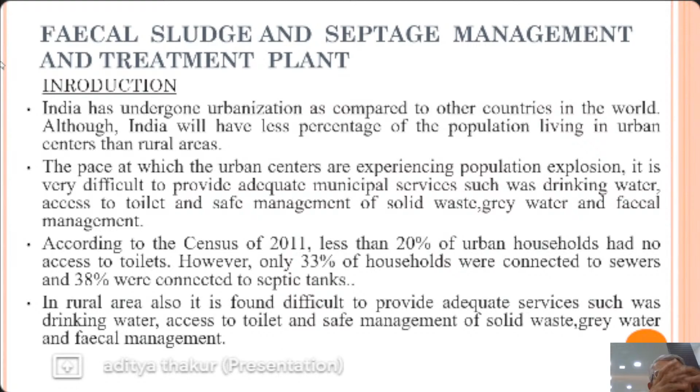Taking a comprehensive look at today's sanitation position in India, it is a horrible situation actually. 37 million people practice open defecation in urban India. 28 million people with individual toilets use insanitary methods of disposal of waste, and 43,117 MLD of untreated waste is discharged into water bodies or on land.

It is a very horrible situation because this untreated wastewater discharge into water bodies pollutes water bodies, and it also pollutes the groundwater, causing pollution and harmful effects to the environment. These cause undesirable changes to the ecosystem, reduction in economic value of resources, aesthetic damages, and human health risks. Contaminants of concern present in the water include pathogens, nutrients, heavy metals, suspended solids, increased biochemical oxygen demand, chemical oxygen demand, and oil and grease.

All this wastewater should be treated properly, or in future we will face a very difficult situation.

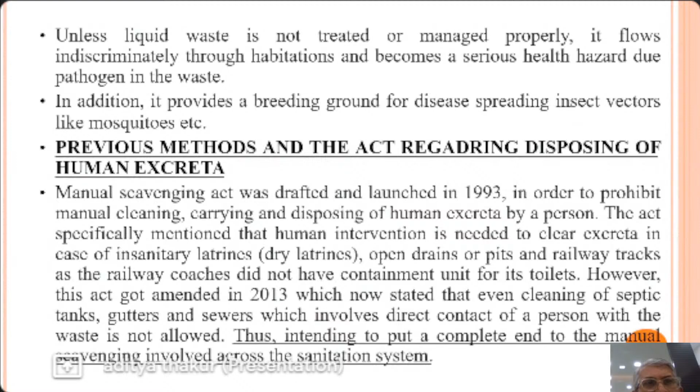In 2014, the Government of India introduced Swachh Bharat Mission, a flagship program with an objective to improve the sanitation situation in India. Although it has many objectives, two important ones pertaining to managing human waste are eliminating open defecation and manual scavenging. In some areas manual scavenging was still practiced, and Swachh Bharat Mission aimed to completely stop it.

To achieve the first objective, certain indicators and guidelines were laid down under the program: no household should engage in open defecation, no insanitary toilets are allowed to be built, and all existing pit latrines must be addressed.

Subsequent to the introduction of the Manual Scavenging Act, the Government of India in 2014 took up the huge task of eliminating open defecation in India. Swachh Bharat Mission was launched, with a focus on making urban and rural habitations open defecation free. The policy specifically mentioned that all households should have access to a toilet, either an individual household toilet or a community toilet.

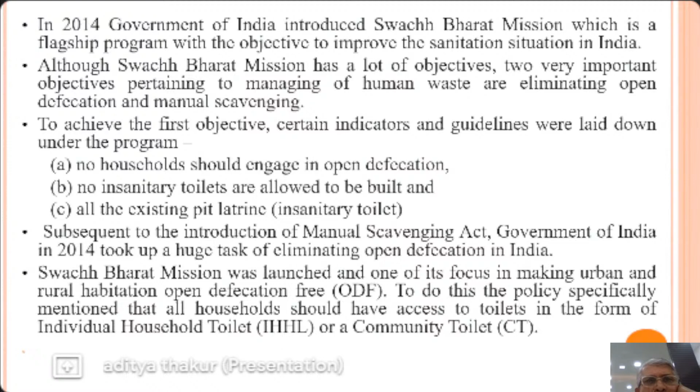But creating infrastructure in the form of toilets and containment systems is only one part. Government soon realized that maintenance of this infrastructure is very important. Without managing the waste originating from the household and containment unit, the objective of sanitation cannot be ensured. So the concept of ODF plus plus was brought forward, which stated that fecal sludge, septage, and sewage should also be safely managed at the local government level.

Then in 2016, fecal sludge and septage management, FSSM, got formal recognition in different forms. Along with the national policy on FSSM, the government provided plenty of guidelines, standards, and resources in the form of primers and other publications.

Now we discuss the present sanitary system in urban centers. In developing countries, due to the availability of water, flush toilets—the wet systems—are the easiest to operate and maintain. Water is used to transport the waste from one point to another. These systems are called wet systems.

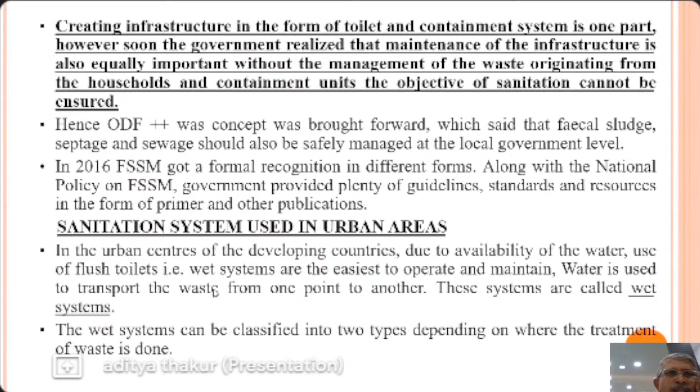For this, sewer lines were laid and waste carried to the sewage treatment plant. This is the offsite disposal system, where liquid and solid waste are carried away from the point of generation using a sewage network. The sewage network brings waste from a mini city, the households, to one point where a wastewater treatment plant is set up. This is called sewer sanitation, that is, offsite.

Then there is the onsite disposal system, where solids are stored in a containment unit and the liquid effluent is disposed of into the ground using a soak pit or soak away. After a duration of a few years, the contained solids are emptied and transferred for further treatment. Since conveyance of the solid is done by mechanized equipment such as vacuum trucks, this type of sanitation system is called non-sewer system.

In rural areas, it is not possible to lay sewer lines to take the wastewater to the treatment plant, so vacuum trucks are used.

Then in some areas, a hybrid disposal system is used. In India, solids are contained in septic tanks at the household level, and the sullage is disposed of into drains outside the houses. The network of drains collects the sullage from all households, and by gravity brings it to surface water bodies such as rivers, lakes, and ponds.

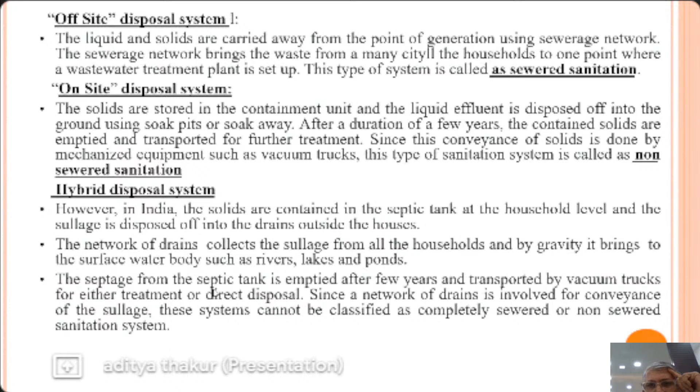Again, we are polluting rivers and lakes by delivering sludge into them. The septage from the septic tank is emptied after a few years and transported by vacuum trucks for either treatment or direct disposal. Since the network of drainage is involved in conveyance of the sullage, this system cannot be classified as completely sewered or non-sewered sanitation system.

So we can see that disposal systems should be properly designed, or otherwise our water bodies and ecosystem balance will collapse.

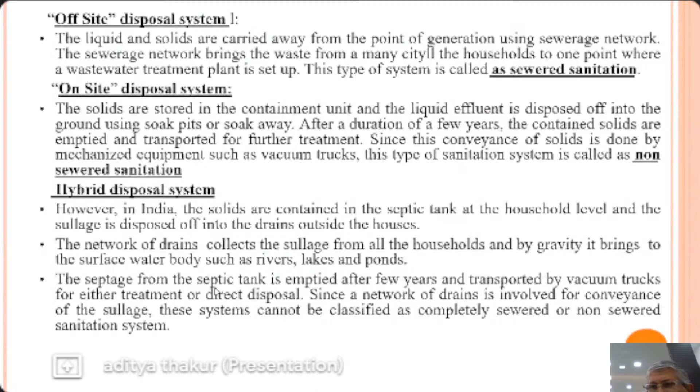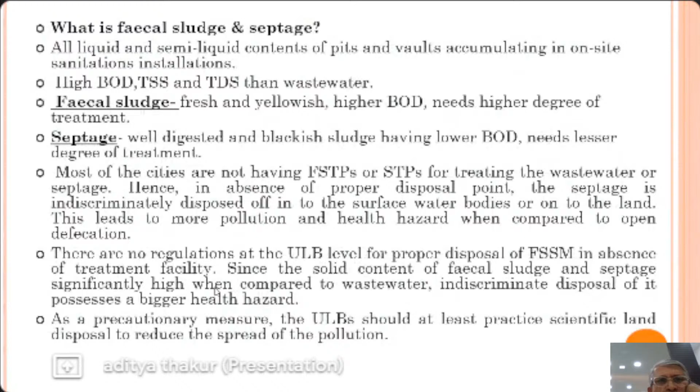So what is fecal sludge and septage? All liquid and semi-liquids contents of pits and vaults accumulating in onsite sanitation installations have high BOD, total solids, total suspended solids and total dissolved solids compared to wastewater. Fecal sludge is fresh and yellowish, with higher BOD, needing a high degree of treatment. Septage is well digested and blackish sludge, having a lower BOD and needing a lesser degree of treatment.

Most cities do not have FSTP or STP for treating wastewater or septage. Hence, in the absence of a proper disposal point, septage is indiscriminately disposed of in surface water bodies. As explained in the previous slide, this causes more pollution and health hazards compared to open defecation.

There are no regulations at the ULB level for proper disposal of fecal sludge and septage management in absence of a treatment facility.

Since the solid content of fecal sludge and septage is significantly higher compared to wastewater, indiscriminate disposal poses a bigger health hazard. As a precautionary measure, the ULB should at least practice scientific land disposal to reduce the spread of pollution. So government has given strict guidelines that fecal sludge should not be disposed in the river or on land, and proper actions and precautionary measures should be taken to avoid further health hazard or ecological imbalance.

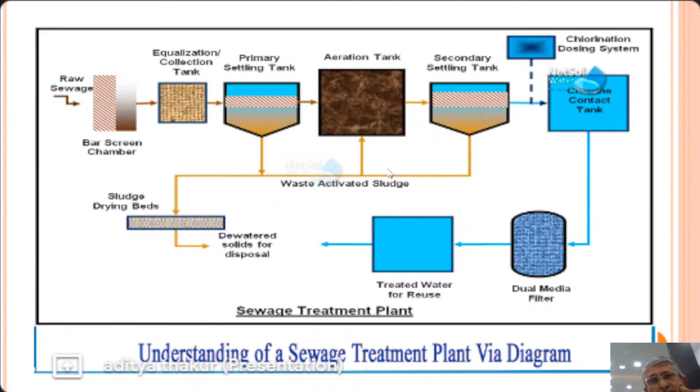So in rural areas, in some rural parts, they could not bear this huge cost. So instead of going for this complex and costly system, government introduced a very simple system which requires less maintenance.

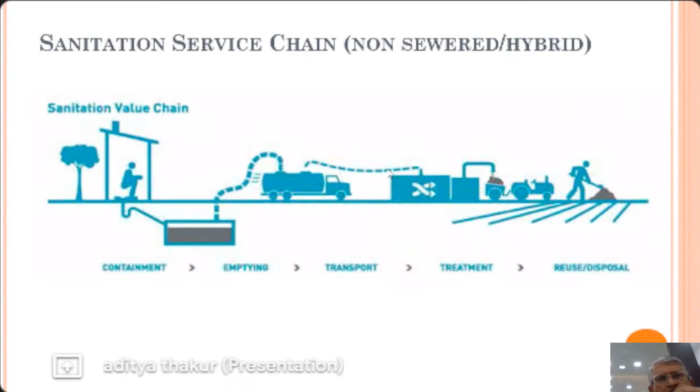Here, STP and FSTP - government now has taken initiative that instead of giving STPs to every ULB, fecal sludge treatment plants are much easier to operate, and have very less cost than providing STP.

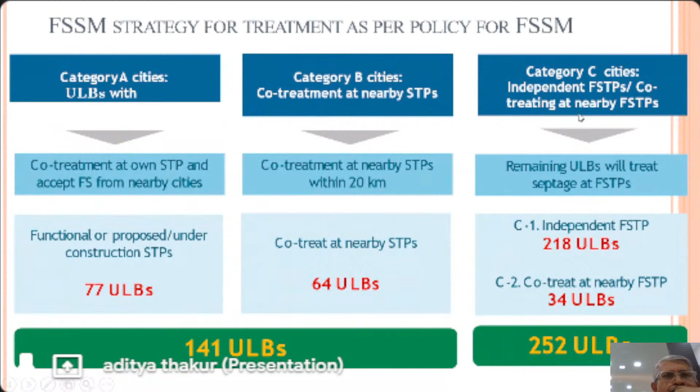So we'll go to the next slide. Benefits of fecal sludge and septage management. Desludging frequency - we have to decide a desludging frequency, in what manner we can go, and what treatment is actually suggested.

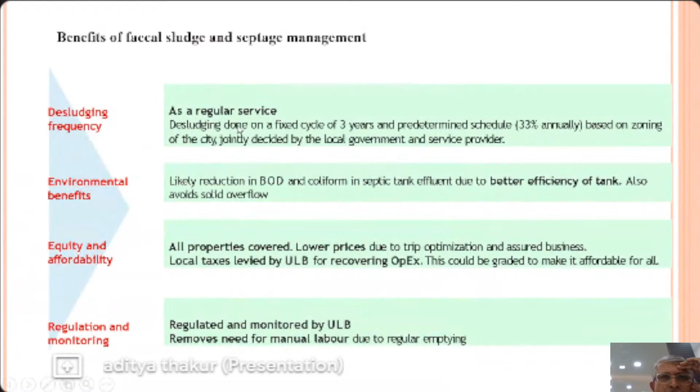We are going to the next slide. First we should study this slide. Desludging frequency as a regular service - desludging done on a fixed cycle of 3 years and predetermined schedule. Actually, in fecal sludge treatment, every household has a septic tank, and after every 3 years, that septic tank should be cleared by vacuum truck, and the sludge should be carried for treatment. So after every 3 years, that septic tank should be cleared.

Then environment benefits - likely reduction in BOD and coliform in the septic tank effluent due to better efficiency of the tank, also avoiding solid overflow. Environment benefit of FST - if you are providing fecal sludge treatment, then the environment benefit is that after treatment, the BOD of that waste is reduced considerably.

That effluent is less than 30 mg per liter, and coliform gets completely removed, and that effluent can be used for gardening purpose or any other use.

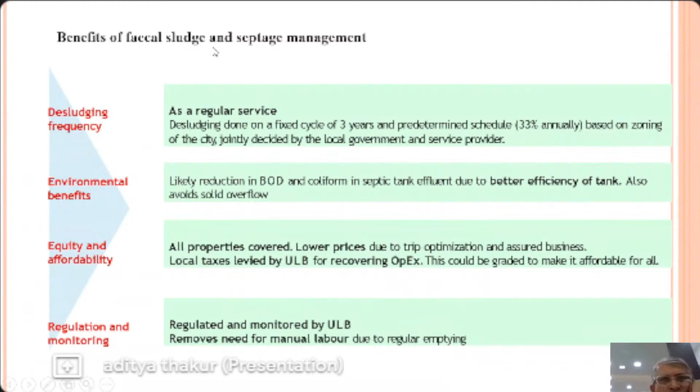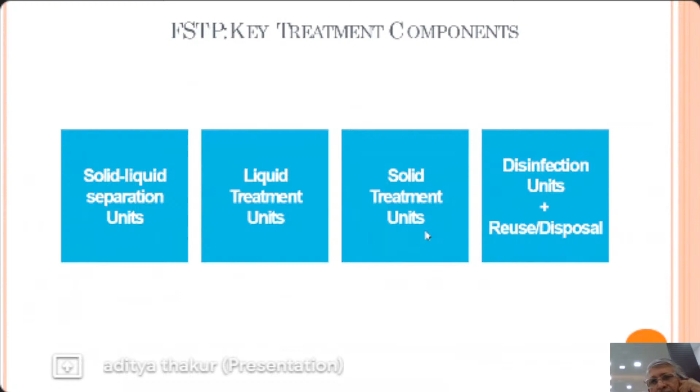seen when fecal sludge treatment plant management is properly done. So in a fecal sludge treatment plant, there are key treatment components: solid-liquid separation and liquid treatment units, then solid treatment units, and fourth, disinfection unit plus reuse and disposal.

There are various septage management options available. Group A: septage to compost, sedimentation ponds first, then sludge drying bed, which includes planted sludge drying bed and unplanted sludge drying bed. Then co-composting, mechanical dewatering, waste stabilization pond, and advanced nutrient recovery - this is group one. Group B includes biomethanation and anaerobic biogas reactor, incineration, gasification, and pyrolysis.

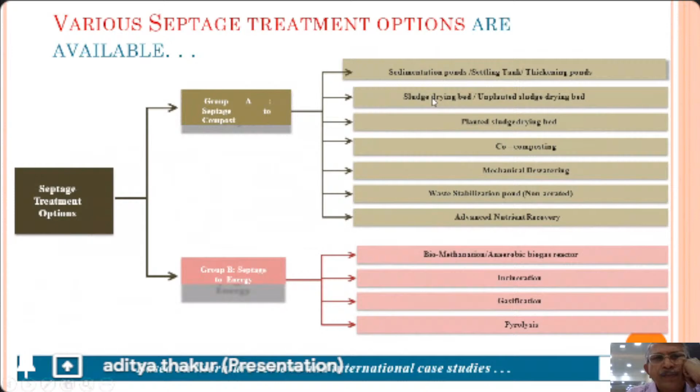These are the groupings done by FSSM, which are beneficial to rural areas. They decided group B is very costly, and therefore in Maharashtra, these four FST (fecal sludge treatment) plants are introduced and approved by NEERI. These four treatments are: one, sludge drying bed; another, planted sludge drying bed; third, upflow anaerobic sludge blanket; and fourth, moving bed bioreactor.

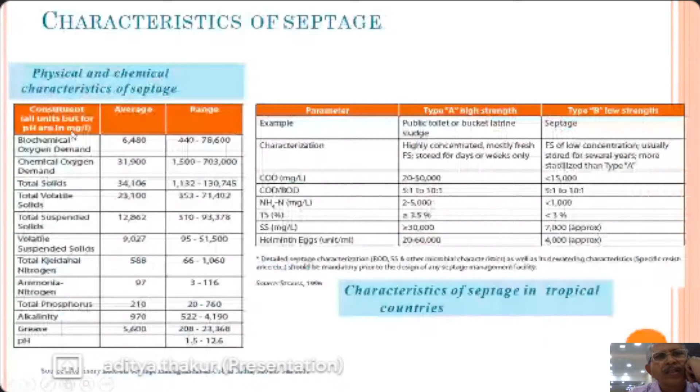Physical-chemical characteristics of septage are given here. Normally, biochemical oxygen demand ranges between 440 to 78,600. Then chemical oxygen demand is...

Sorry, there was an urgent call from my boss, for a minute please.

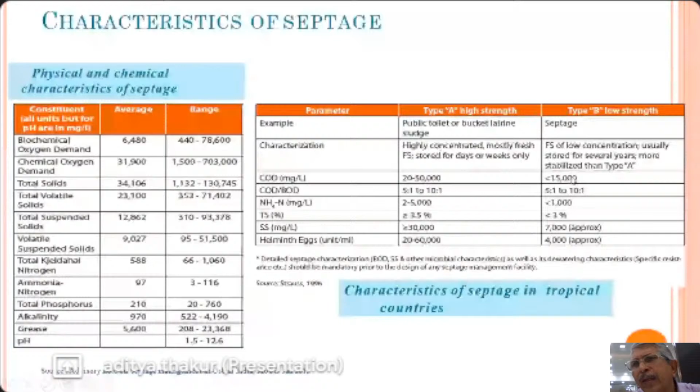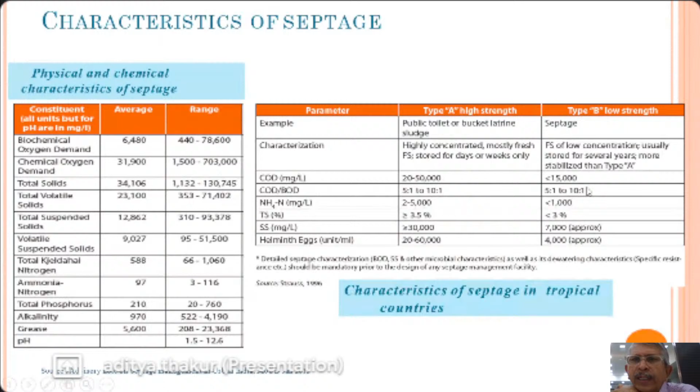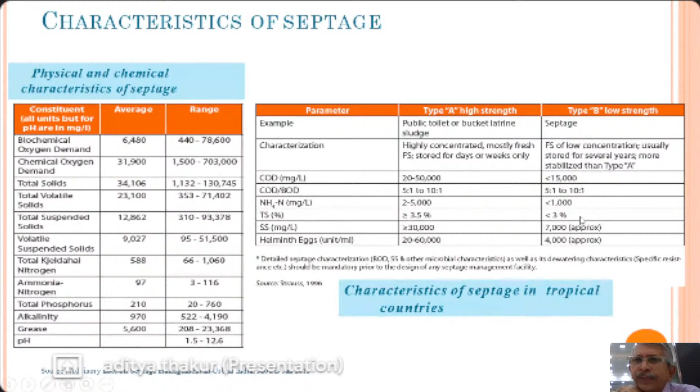We can treat this septage.

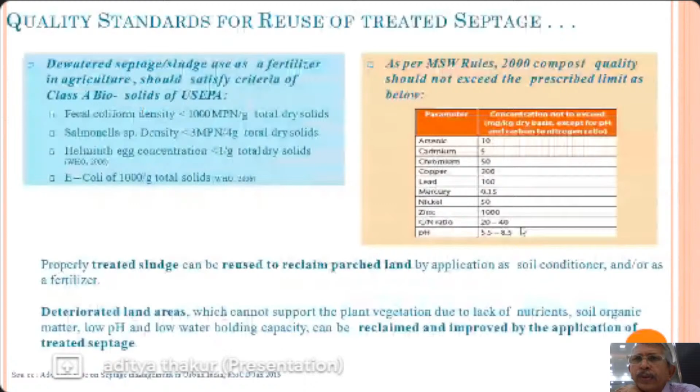As per MSW rules, the content concentration not to exceed the prescribed limits are given here. Arsenic should be up to 10 only, cadmium up to 5 only, chromium - all these are parameters in MSW.

Dewatered septage sludge is used as fertilizer. The fecal coliform density should be less than 1000 MPN. Salmonella sp. density shall be less than 3 MPN, and E. coli less than 1000 per gram of total solid. All these are the quality standards

if we want to use the treated sludge. Properly treated sludge can be used to reclaim parched land by application as a soil conditioner or fertilizer. Deteriorated land areas which cannot support plant vegetation due to lack of nutrients, soil organic matter, low pH, and low water holding capacity can be reclaimed and improved by application of treated septage.

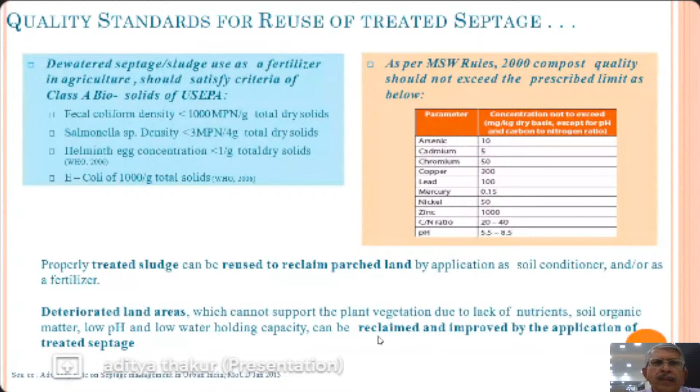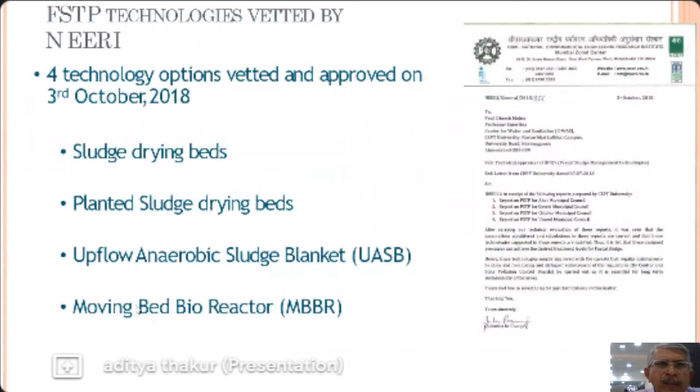Before selection of the technologies, all five components are very necessary: land requirement, electricity requirement, management capacity, fund requirement, and local conditions. So before selecting the technology, all 5 points should be studied first.

I told you in the previous slide that four technologies were introduced by government of Maharashtra. Every rural body or urban local body could not bear UASB or MBBR, so they can go for unplanted or planted sludge drying bed, because land requirement is relatively high, and in rural areas land can be easily available. But in urban areas, land issues are very high, so UASB and MBBR, which require less space, can be provided there.

Then electricity requirement: in rural areas they have low electricity, and in some rural areas we are still facing electricity problems, so electricity-based technologies like STPs and FSTPs cannot be offered in rural areas. But urban local bodies have continuous electricity supply and can afford it by applying taxes. Then management capacity - in rural areas there is a lack of human resources.

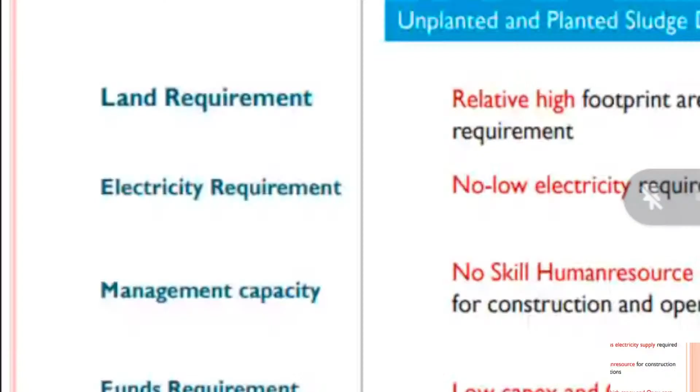It will not be affected by the rainy season, because they are very compact systems.

Directly going to the systems, we are using the four FSTP system. The first is the unplanted sludge drying bed.

Here, septage is collected by vacuum truck from every household, and then that truck is emptied into the settling tank having a screen. The screening is done and the floating matters are removed.

The unplanted sludge is moved to the unplanted sludge drying bed, and after pouring the sludge into this bed, the liquid from the wastewater goes to the anaerobic baffle reactor.

This anaerobic baffle reactor is nothing but an improved septic tank. It has an RCC chamber with baffle walls.

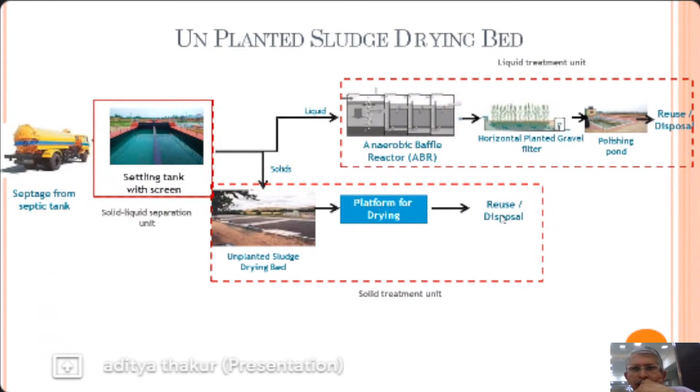In Bhubaneswar, Odisha, this type of plant is installed. It has a capacity of 75 KLD, and the capital cost incurred was 285 lakhs rupees. For this plant, they required 19.25 lakhs per annum for operation and maintenance, and it was situated in 10,117 square meters. This plant was commissioned in June 2018 and is still properly operated by private operators.

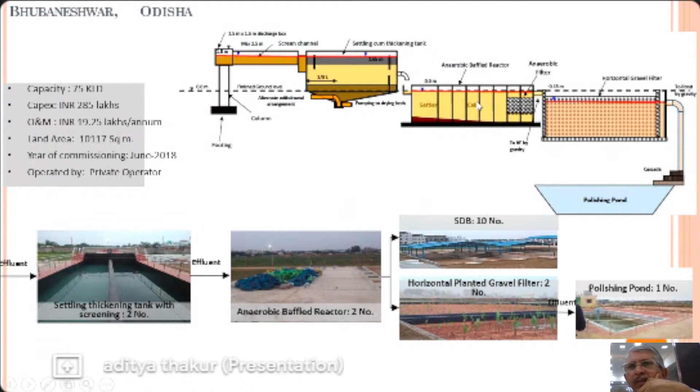Now you can see the plan here: the truck discharges the fecal sludge here, then through the channel it goes to the unplanted sludge drying bed, and from the sludge drying bed it goes to the anaerobic baffle filter, and from there it goes to the horizontal gravel filter. The clear water is then sent to the polishing pond. This is the elevation, which we can easily understand.

In this unplanted drying bed, there are various layers of material provided in the sludge drying bed.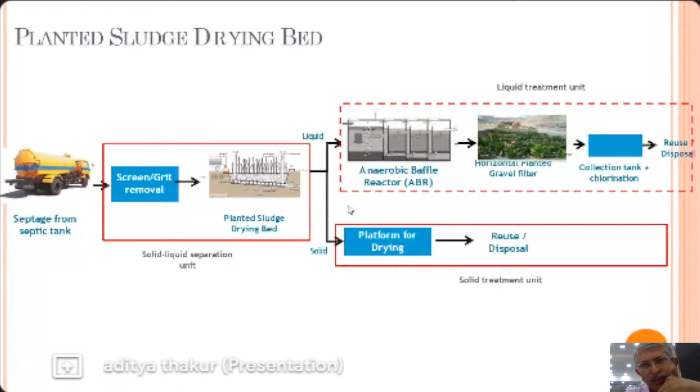Here in this sludge drying bed, the plants are there. You can see the plants here, and these plants also have a role to reduce odor of the water, and take part in the digestion of organic matter in the wastewater.

Same thing here: the liquid is sent to the anaerobic baffle reactor, and the solid, after drying, the sludge is sent to the platform for drying as manure and used for disposal.

After the wastewater is allowed to pass through the anaerobic baffle reactor, considerable BOD of the wastewater is reduced, and then it is allowed to pass through the horizontal planted gravel filter.

After the gravel filter, water passes and is collected in the tank, and that can be allowed for use. Sometimes chlorination is also done if needed.

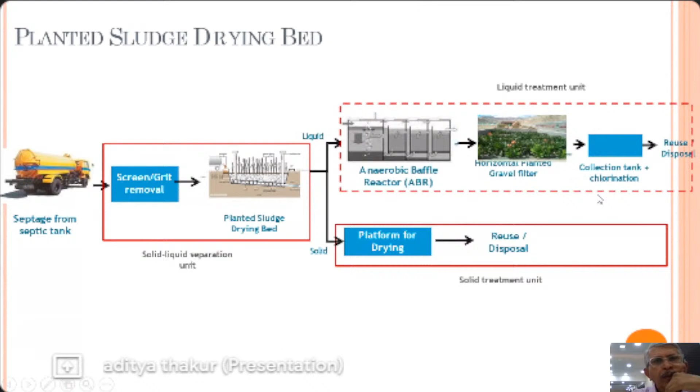This type of FSTP is at Leh area and Khulna. In Leh, a 12 KLD plant was constructed. Land required was 720 square meters only, capital cost involved was 52 lakh rupees, and operation and maintenance cost was 10 lakh rupees per year. It was commissioned in 2017, and it is still working.

After every system, I would like to show these plants to you, because these technologies are not only on paper, but they are already executed at the site. So I am interested in showing all these costs and photos to you.

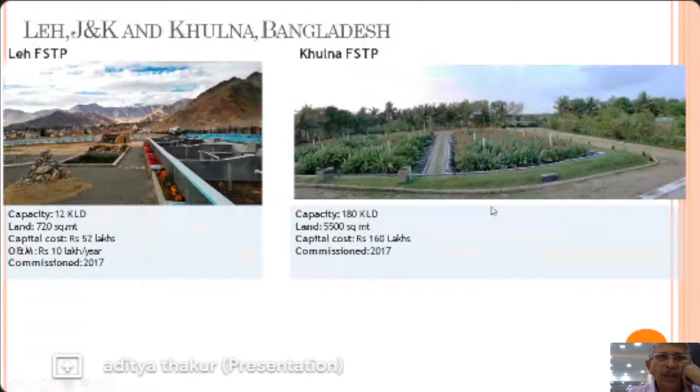Now, upflow anaerobic sludge blanket. I already told you this is the costliest type of FSTP technology, and this can be afforded only by rich municipal corporations, which can share their contribution toward the money spent on construction. It has septic waste from a septic tank, which can be collected from the vacuum truck.

Then screen and grit removal is done here. Then the collection tank. Then the water collected goes to the clarifier to settle down, flocculation takes place there, and then it is sent to the UASB reactor, that is the upflow anaerobic sludge blanket.

It has a typical construction here, so my time doesn't permit me to explain in detail. But if I get another lecture, I may explain to you in detail what UASB is and how it works.

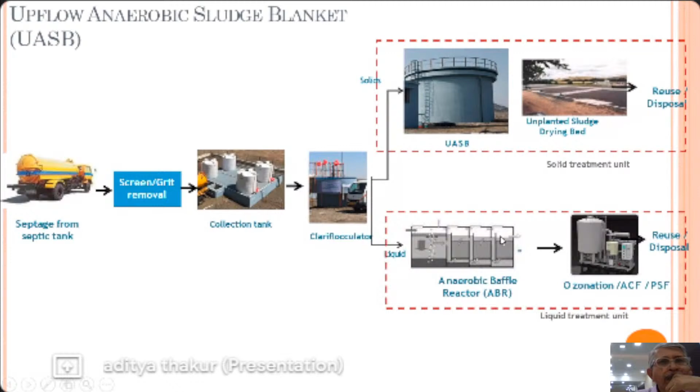Then, the UASB system is installed in Sinnar.

It has the capacity of 70 KLD, and the plant is situated in 1,547 square meter land. Capital cost involved was 1 crore 63 lakhs, and operation maintenance cost was 8.3 lakh per year. It was commissioned in 2019. It's a recent plant, a very good plant. If anybody is interested, they can go and see it. It is working very finely, and the effluent was also very good, meeting the standard set by MOEF. So this is achievable, appreciable work done by the Sinnar Corporation, Sinnar Council.

Then another plant is at Cochin. It has a capacity of 100 KLD, and land required for this is 1,200 square meter. Capital cost was 275 lakhs, and it has a huge O&M cost required because its capacity is higher. It requires 24 to 30 lakhs per year, as compared to Sinnar, because there are different cost parameters involved—why the cost is low, operation cost is higher or lower.

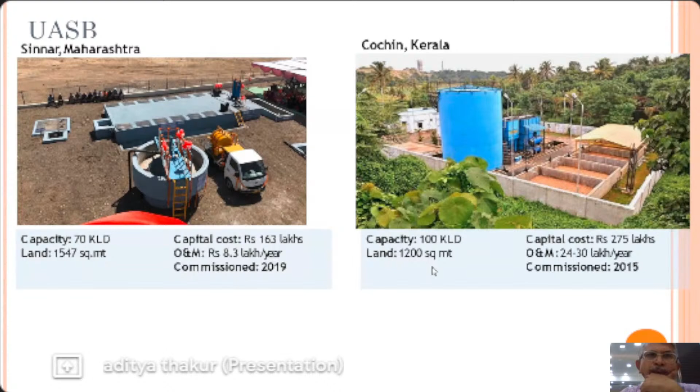Now, moving bed bioreactors. This type of FSTP is also running very well, and here a moving bed bioreactor is used. BOD is reduced considerably. The flow diagram is: septage from the septic tank is allowed to the collection with the screen, then after screening, the solid-liquid separation unit is there. After solid and liquid separation, the liquid is sent to the MBBR package unit. These package units are available and can be manufactured by the manufacturer as per our required capacity, from 10 KL to 200 KL.

This plant is working also. I'm interested to tell you the working of this MBBR, but time doesn't permit me, so I will discuss it in the next lecture if I get the chance. In this MBBR unit, the water is treated—this is the attached growth type system. Wastewater is treated here, and then it can be used for disposal. It can be reused or can be disposed of safely in the river or the lake.

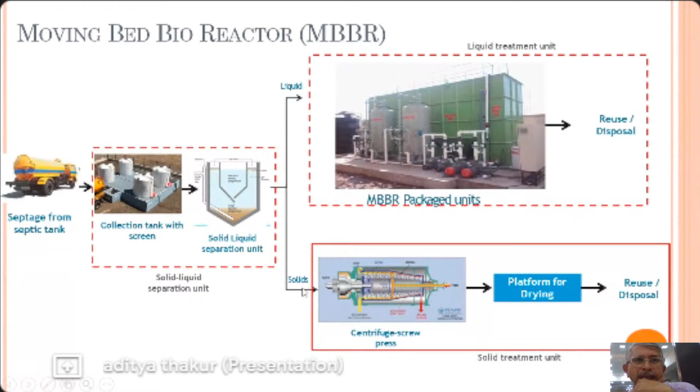So all these four systems are there. This MBBR type is installed in Ambikapur, Chhattisgarh, having capacity of 5 KLD. I think the work is not completed yet. It was commissioned in 2017, and its capital cost involved was 23.35 lakh. It was a very small plant, 5 KLD, and operation maintenance cost was rupees 2.5 lakh per year.

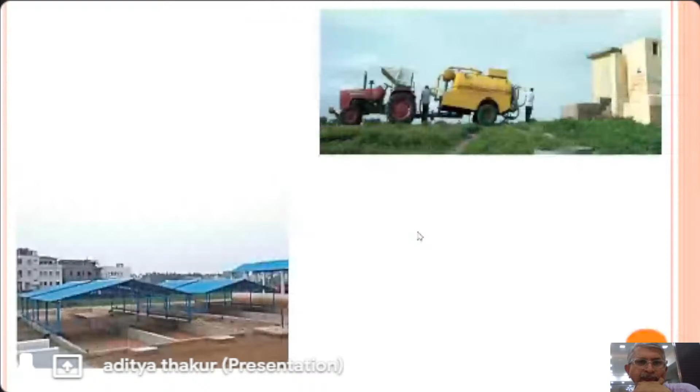Now I have some videos from when we visited the site, which you can understand very well from this video. And from my side, it is over. Then I would like to show you the videos regarding the FSTP.

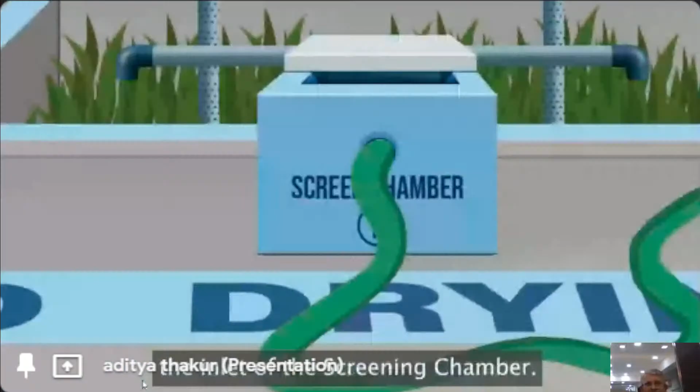कार्य करते वक्त ये बहुत जरूरी है कि ऑपरेटर ने पीपीई किट, मास्क, ग्लव्स और गमबूट्स पहने हों और सुरक्षित तरीके से मल का निष्पादन हो रहा हो। स्क्रीनिंग चेंबर प्लांटेड ड्राइंग बेड यानी पीडीबी से जुड़ा होता है।

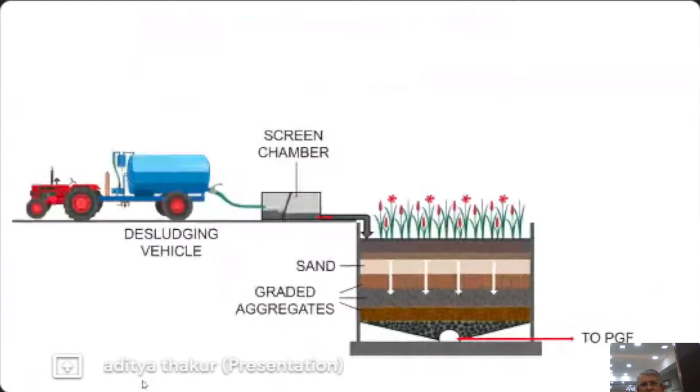पीडीबी मल के ठोस एवं द्रव्य पदार्थ को अलग करने का कार्य करता है। पीडीबी एक विशिष्ट उपचार प्रक्रिया का यूनिट है जिसमें अलग अलग आकार के पत्थरों की वर्टिकल सतह बनी होती है।

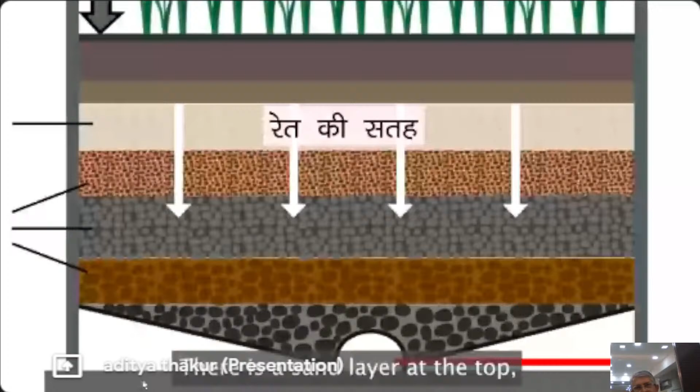सबसे ऊपर सैंड लेयर होती है, उसके बाद छोटे पत्थर और सबसे नीचे बड़े पत्थर होते हैं। बड़े पत्थर के साथ साथ ऊपर की ओर केना के पौधे भी लगाए जाते हैं, जो कि पानी को फिल्टर करने का कार्य करते हैं।

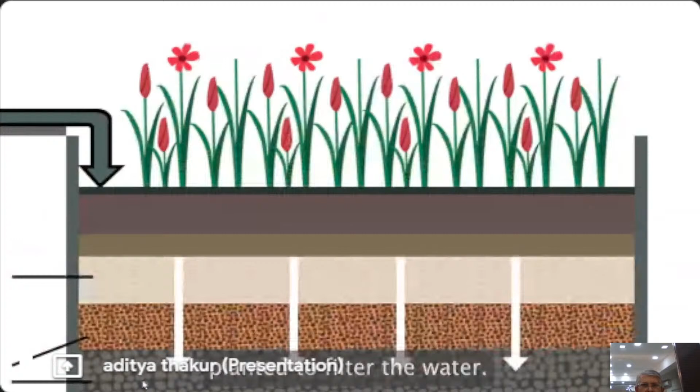ये फिल्टर मीडिया एक छन्नी का काम करती है। ठोस मल बेड के ऊपर रह जाता है और द्रव्य फिल्टर मीडिया से होते हुए शुद्धिकरण के लिए आगे की प्रक्रिया में जाता है।

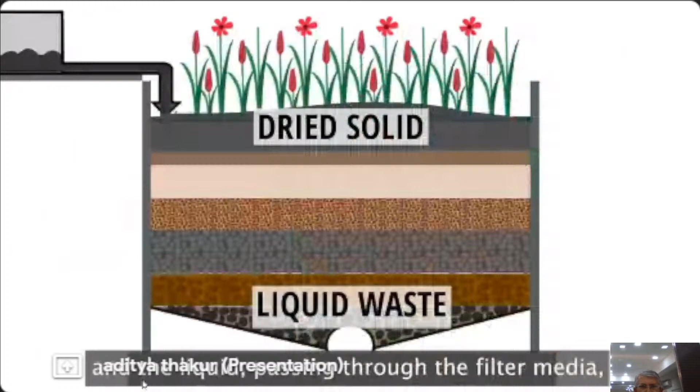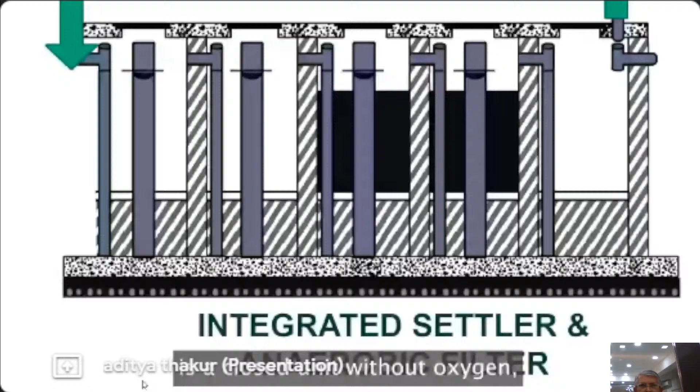इंटीग्रेटेड सेटलर में चला जाता है। इंटीग्रेटेड सेटलर एंड एनारोबिक फिल्टर एक ऑक्सीजन रहित बंद यूनिट है जिसमें दो कक्ष एक बैफल वॉल के द्वारा अलग होते हैं। इंटीग्रेटेड सेटलर एंड एनारोबिक फिल्टर में 90% तक प्रदूषकों को कम किया जाता है।

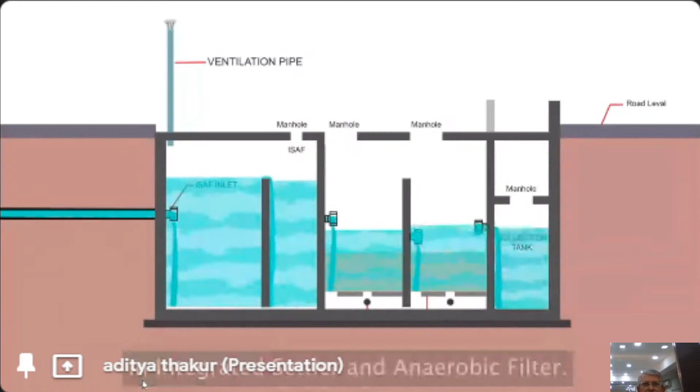दुर्गंध व रंग हटाने के लिए और दूषित जल में ऑक्सीजन की मात्रा बढ़ाने के लिए जल को कंस्ट्रक्टेड वेटलैंड में लाया जाता है। यह एक हॉरिजॉन्टल फिल्टर मीडिया है जिसमें अलग अलग आकार के पत्थरों से गुजरकर दूषित जल प्रवाहित होता है।

मैक्रोफाइट या जलीय पौधों की मदद से जल में ऑक्सीजन की मात्रा बढ़ती है और जल शुद्ध करने के लिए अनुकूल जीवों को पनपने में मदद करती है। और अंत में पॉलिशिंग पॉन्ड, जहां उपचारित जल को पुनः शुद्धिकरण कर संग्रहित किया जाता है।

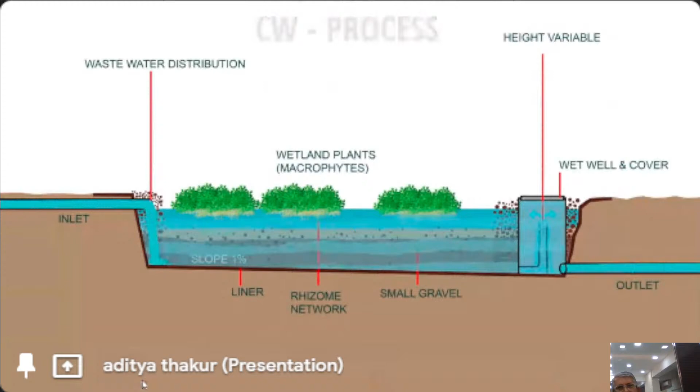ये जल को एकत्रित करके रखने के साथ साथ हवा और सूरज की रोशनी से पुनः उसका शुद्धिकरण करता है। पॉलिशिंग पॉन्ड में उपचारित जल का वाटर टेस्टिंग, बीओडी, सीओडी और पैथोजेंस का टेस्ट किया जाता है।

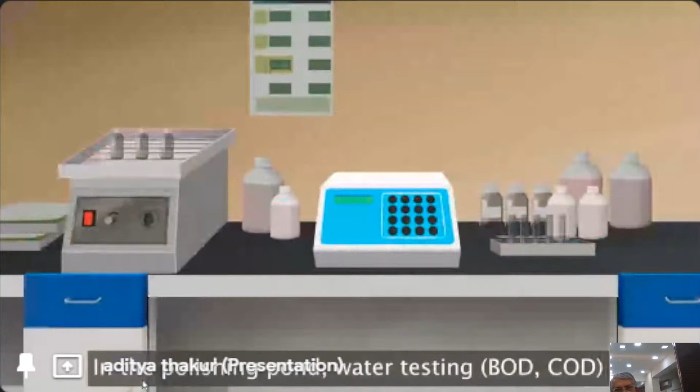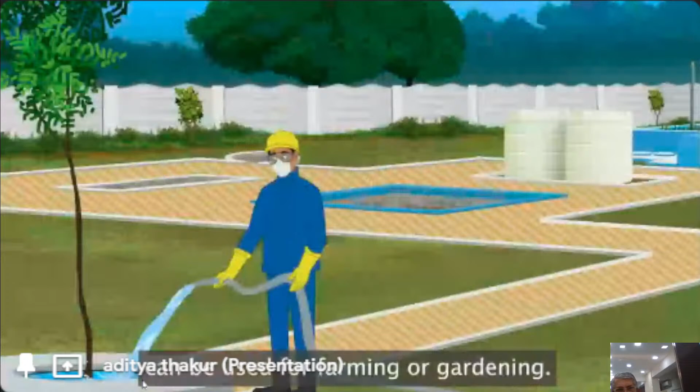पॉलिशिंग पॉन्ड के जल को खेती या बागवानी जैसे कार्यों में इस्तेमाल किया जा सकता है। और तो और सूखे हुए मल को कंपोस्टिंग के बाद खाद के रूप में प्रयोग किया जा सकता है।

क्या आप जानते हैं कि मानव मल को सोन खाद भी कहा जाता है?

ये तो हो गया एफएसटीपी के बारे में, मगर अभी एक और जरूरी बात जानना बाकी है। स्वच्छता सिर्फ अपनी ही नहीं, अपने आसपास की भी जरूरी है और इसके लिए हमें कुछ बातों का ध्यान रखना बहुत जरूरी है।

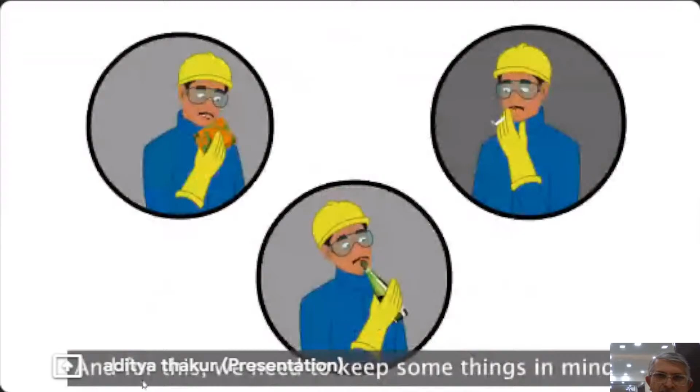सफाई कर्मी उक्त कार्य करने के पश्चात अपने आप को सही तरीके से सैनिटाइज करें।

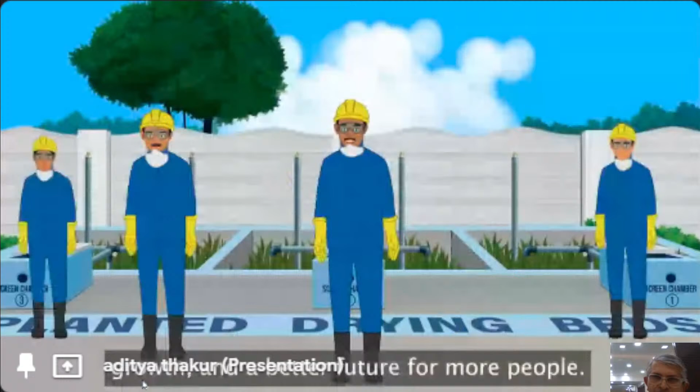यह एफएसटीपी एक बदलते हुए भारत का साक्षी है। पतौरा के साथ साथ आसपास के भी ग्राम पंचायतों के लिए ये एक अनमूल्य तोहफा है और मेरी तरह और भी लोगों के रोजगार, बढ़ोतरी और बेहतर भविष्य का सुनहरा अवसर है।

Now, the second video is from Khopoli Nagar Parishad. It is also a wonderful plant. We have visited there. Please take a look of it.